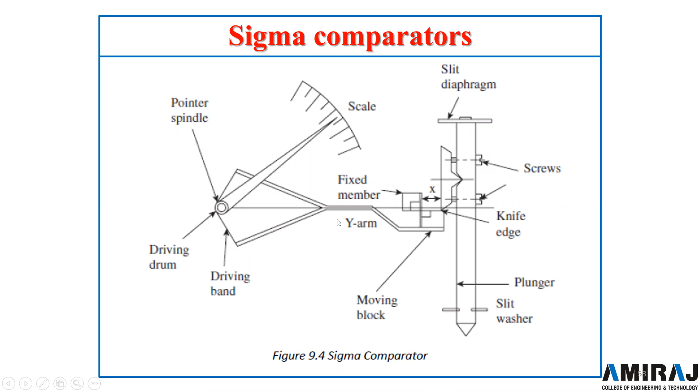Here you can see the figure of the sigma comparator, which was having the knife edge and a Y fork or arm with a drum and a metallic strip. Then after the sigma comparator, we have seen the advantages and disadvantages of the mechanical comparator. Then the mechanical optical comparator, which works on the optical principle of reflection. So with the angle of inclination alpha, it will give 2 alpha, double the magnification.

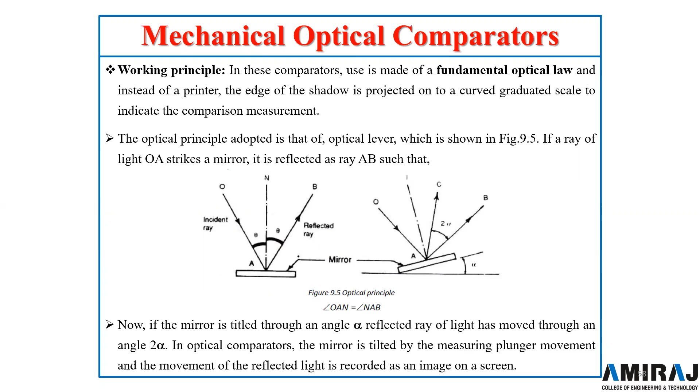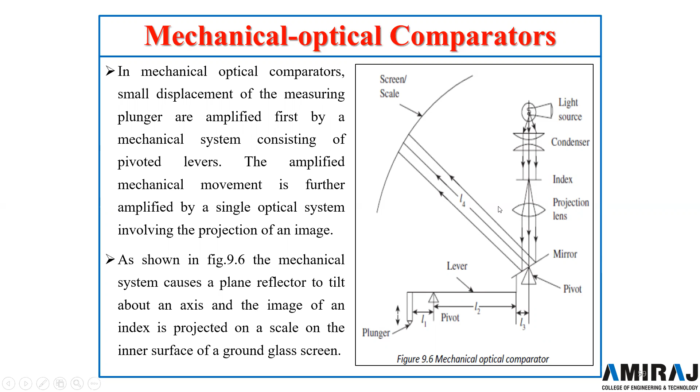So here in the mechanical optical comparator, you can see from the figure there were two amplification stages. One was the mechanical amplification due to this lever arrangement, and the second one is the optical amplification. So the double amplification system will be in action. So the overall amplification you can see by this.

comparator. Now the Zeiss Ultra Optimeter, we can see it is a purely optical system which does not involve any mechanical component. It uses only light, and thus the double reflection gives the higher degree of magnification. As the first mirror will give 2 alpha and the second mirror will give again double, 2 alpha. So 4 times the amplification will be there.

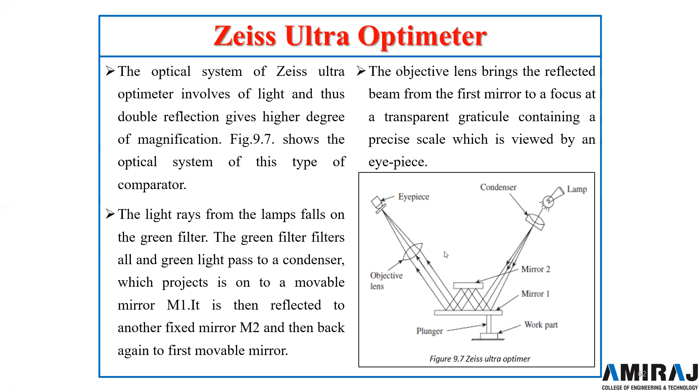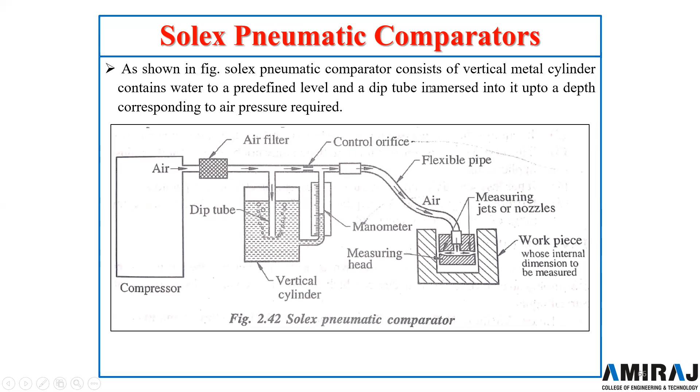So a calibrated manometer tube is connected between the vertical cylinder and control orifice. Then the flexible pipe is used to connect the measuring jet and cylindrical control orifice manometer unit. Air at a certain pressure is supplied from the air compressor system, designed in order to supply air at constant pressure to the measuring jet.

If the pressure of the air supplied is higher than the predefined pressure, some air will bubble out from the bottom of the dip tube and the air moving to the control orifice will be at predefined constant pressure. The constant pressure air then passes through the control orifice and escapes from the measuring jet when there is no restriction provided by the workpiece to the escape of air. The level of water in the manometer tube will be the same as the level of water in the cylinder.

But when the restriction is provided at the measuring jets, it increases the back pressure and the level of water in the manometer falls, which varies the height of water in the manometer tube. So a calibrated scale is set beside this tube. In other words, the restriction to escape of air depends upon the variation in the dimensions to be measured.

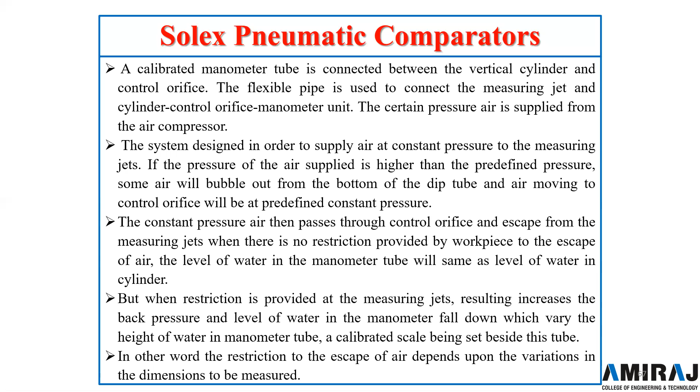So you can see what happens when we do the measurement. Restriction is provided at the measuring jet and increases the back pressure; the level in the water manometer falls down, which varies the height of water in the manometer. So the tube is calibrated, and the scale is set at that particular position. So this is about the Solex pneumatic comparator.

So the advantages of the pneumatic comparator: there is no direct contact between the comparator measuring head and the workpiece. Hence, no wear takes place. Less number of moving parts, less friction, wear, and inertia.

Indicating instrument can be remote from measuring unit. Measuring pressure very small. Jet of air helps in cleaning dust. High magnification, and best for determining ovality and taperness of the circular bores. And they are very suitable for measuring diameter of the hole where the diameter is small compared to length.

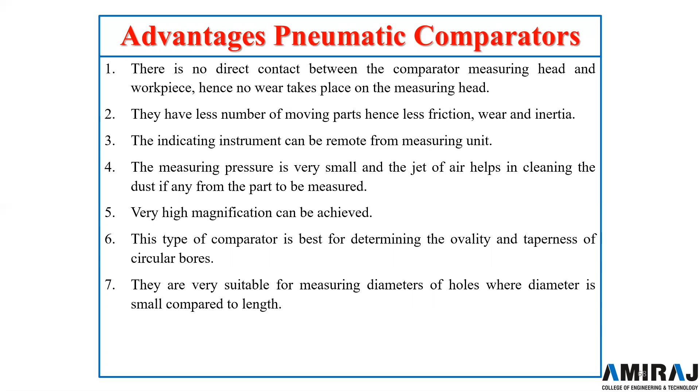Disadvantages: scale is generally not uniform, requires compressed air, then the comparator is not portable, as the size is bulky, less sensitive compared to electric or electronic comparator. The different gauging heads are required for different dimensions, and hence limited range of measurement is available.

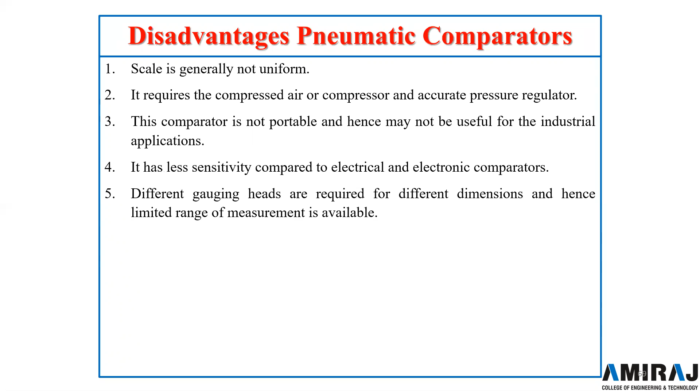Then next type of comparator which is better than this pneumatic comparator, that is the electrical comparator. So basically the electrical comparators are known as electromechanical measuring systems, as this system employs an electromechanical device which converts a mechanical displacement into electrical signal.

So the linear variable differential transformer, LVDT, is the most commonly used electromechanical device which is used to convert the displacement into electrical signal. So the displacement is converted into voltage. LVDT is a basic simple example you might have seen in the weight measuring devices, where the displacement due to the weight is measured and converted in terms of voltage.

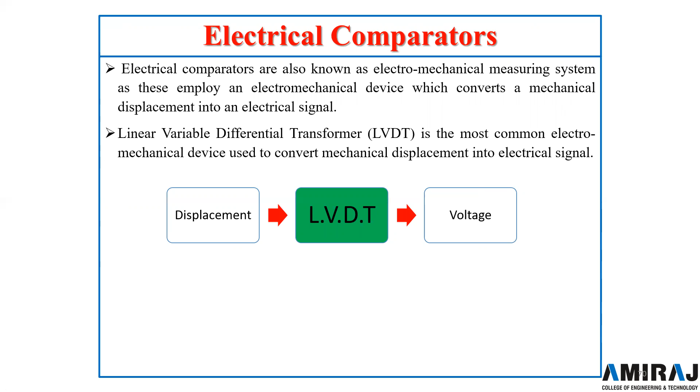Now working of the LVDT. So when the AC current is supplied to the primary winding over here, the magnetic flux generated by the coil is distributed by the armature or the ferromagnetic core. So the voltages are induced in the secondary winding. Now the secondary windings are identical, symmetrically placed, and are connected in phase opposition, so that the voltages induced in the secondary windings are opposite when the armature is at reference position, and the position of the magnetic core determines the flux linkage with each winding.

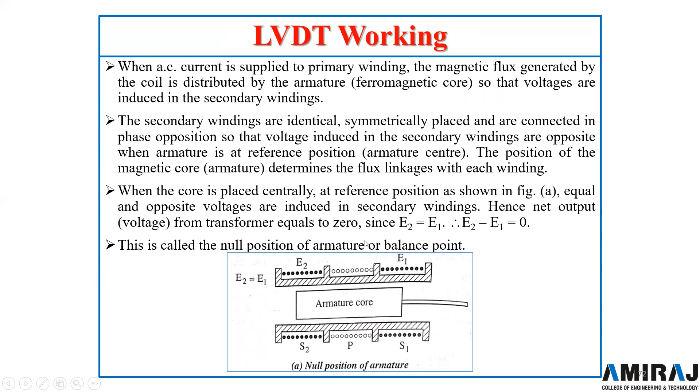When core is placed centrally at the reference position, as shown in figure A, this is the null position. So equal and opposite voltages are induced in the secondary winding. Hence the net output voltage from the transformer equals 0. So E2 is equal to E1. So E2 minus E1 is equal to 0. This is called the null position of the armature or the balanced point.

It is observed that the magnitude of VO is a function of the distance moved by the armature, and its polarity or phase indicates in which direction it has moved. Hence, the pressure acting against the elastic element like Bourdon tube, bellow, diaphragm can be measured in terms of unbalanced voltage VO between two secondary windings.

So this displacement is converted in terms of voltage, and this voltage variation can be calibrated in terms of displacement moved by the armature. So this is how the LVDT works, and we can use this for measuring the displacement. It can be connected to the Bourdon tube, bellows, or diaphragm type of mechanical device.